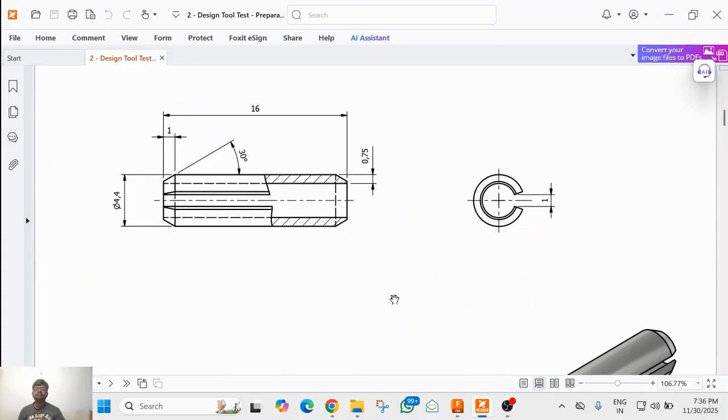So we have a barrel kind of a shape. So what we can do is we can create a concentric circle and we can extrude it to create a cylindrical shape like this, and we can then apply the chamfer at the ends, and then we can use the extrude cut feature to cut a slot in this like this.

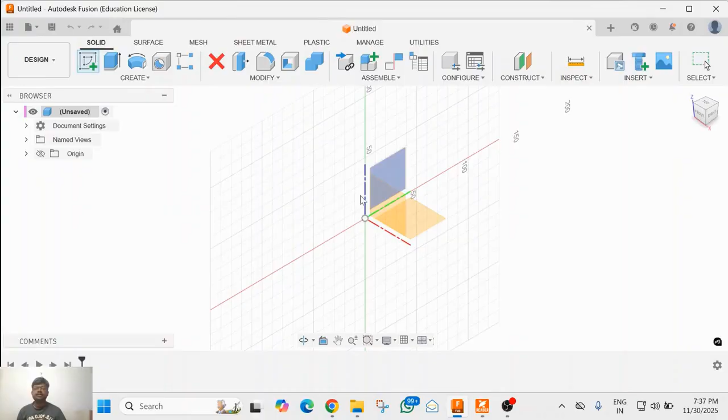So the first thing is to open Fusion and click on the create sketch, and I'm going to select this particular plane and I'm going to draw two circles. And then I'm going to give the dimension. So the dimension of the outer circle is 4.4 millimeters.

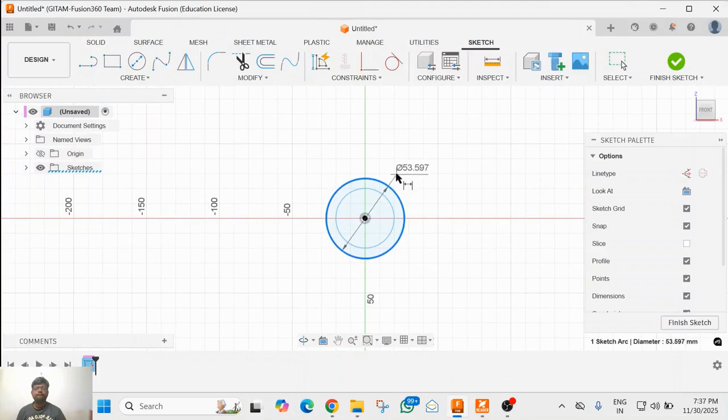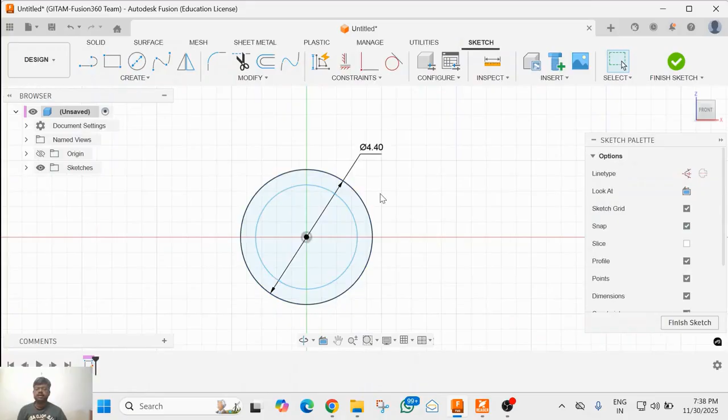And then I'm going to reduce the inner circle like this, and then I will press T on the keyboard, and this is going to be 0.75. As you can see it here. I'm going to say finish the sketch,

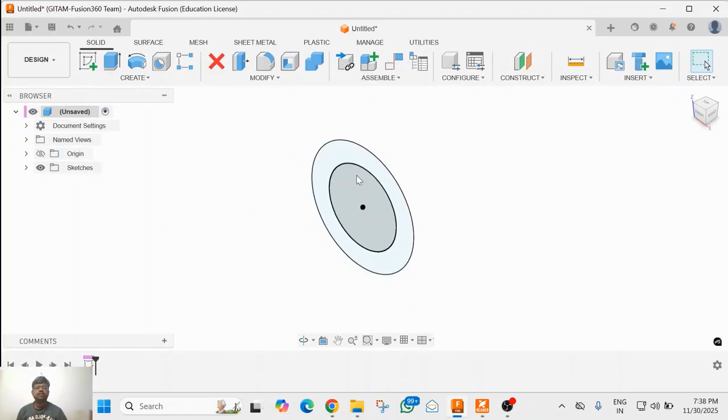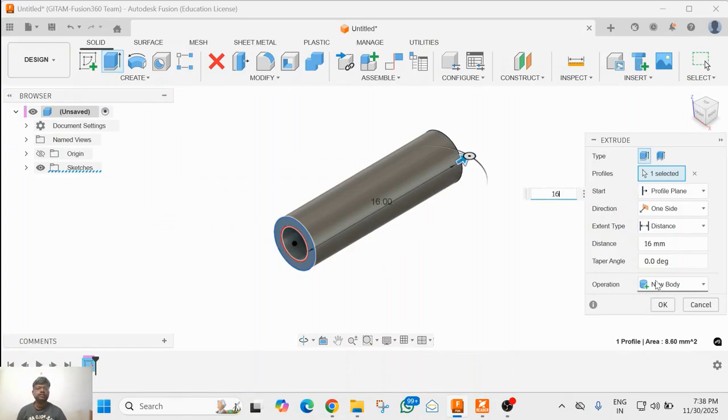and I'm going to zoom out and select this particular face with the left mouse button, and I'm going to extrude it like this. So the length is 16 millimeters. So the length is going to be 16. Now click on OK, and let me save this as exercise 1.

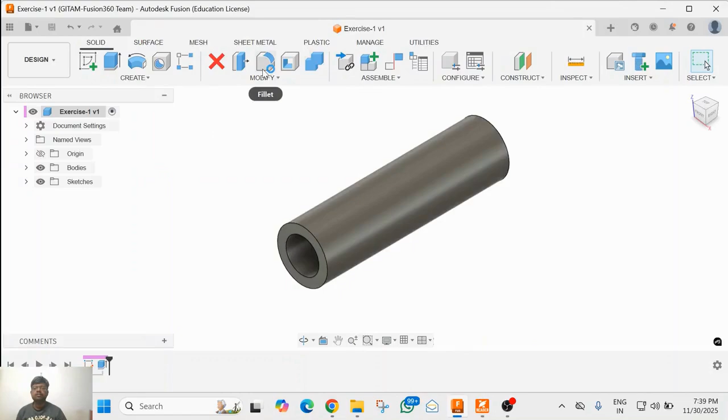And then I am going to apply the chamfer. The chamfer length is 1 mm and at an angle of 30 degrees. So I am going to modify, click on chamfer. I'm going to select this particular edge,

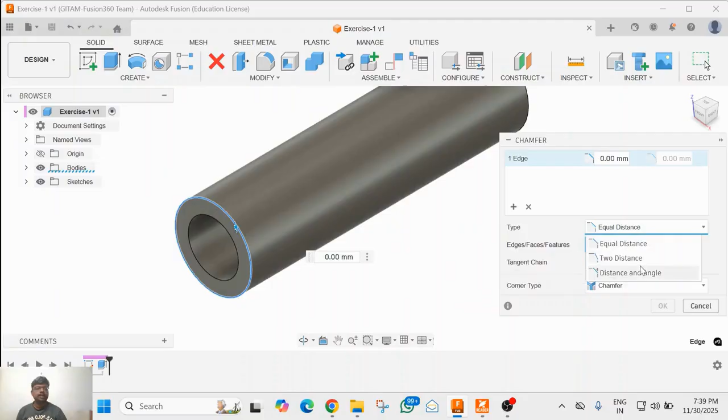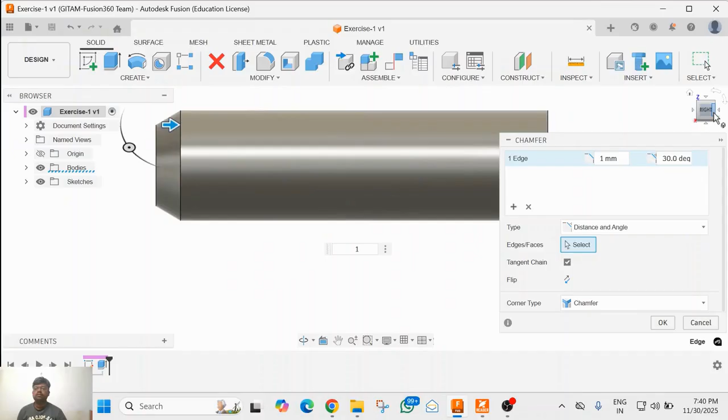and then I'm going to select distance and angle, and the distance is going to be 1 mm, and angle is going to be 30 degrees. There you go. Similarly, I'm going to do it for the other end. By using a view cube, you can move the view like this.

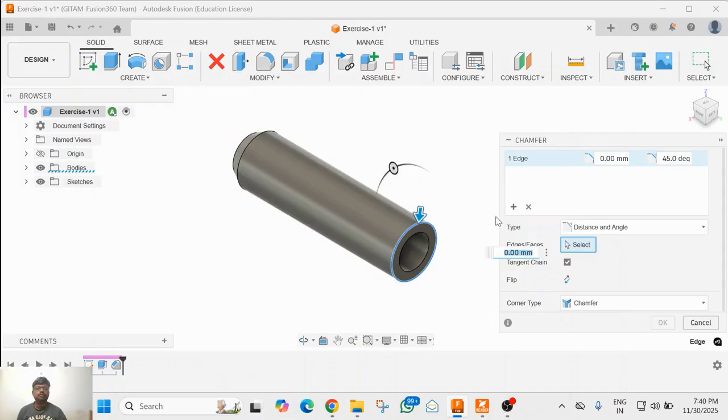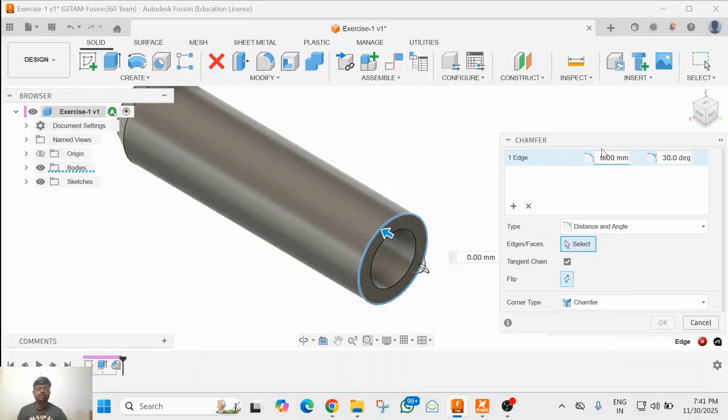Again, I'm going to say chamfer, and I'm going to chamfer this edge. And it is going to be 1 mm. And again, this is going to be 30 degrees. And I'm going to enter a length of 1 mm. Click on OK. I'm going to save this, and finally we have a slot like this.

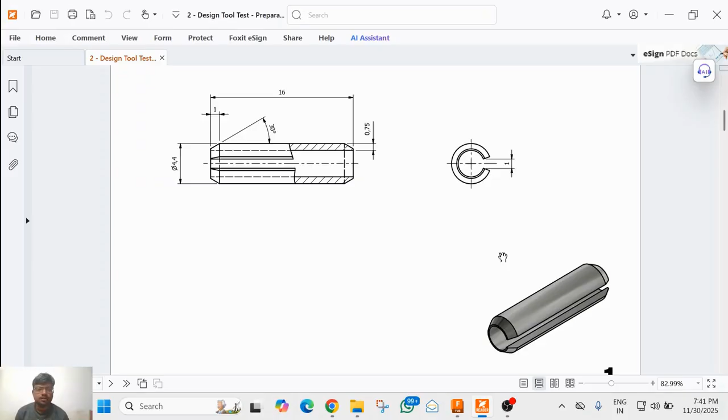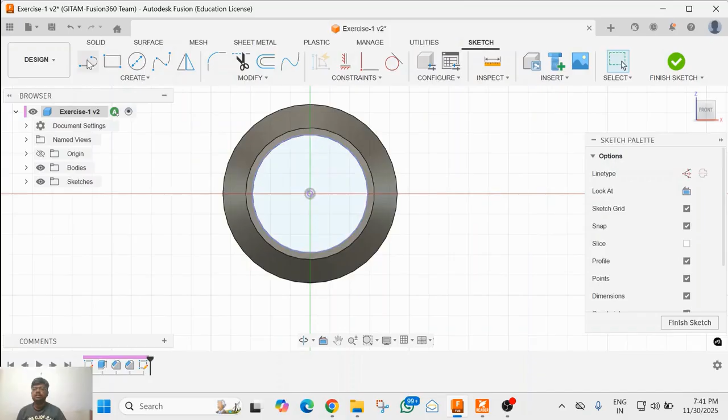So to cut the slot, I'm going to create a sketch. I'm going to select this plane and I'm going to project this particular inner face as a projection, and I'm going to create two lines like this, and I'm going to press D on the keyboard.

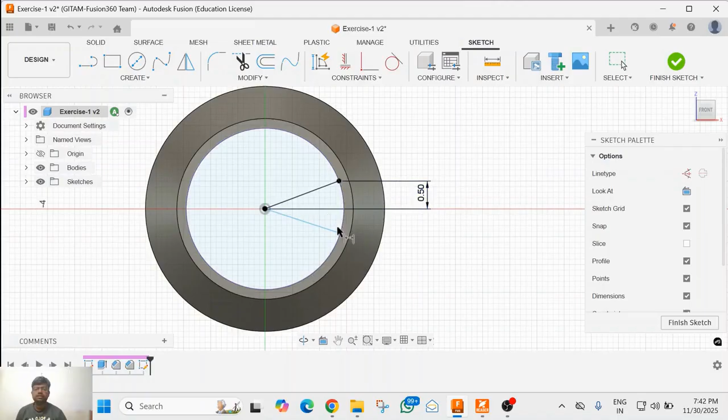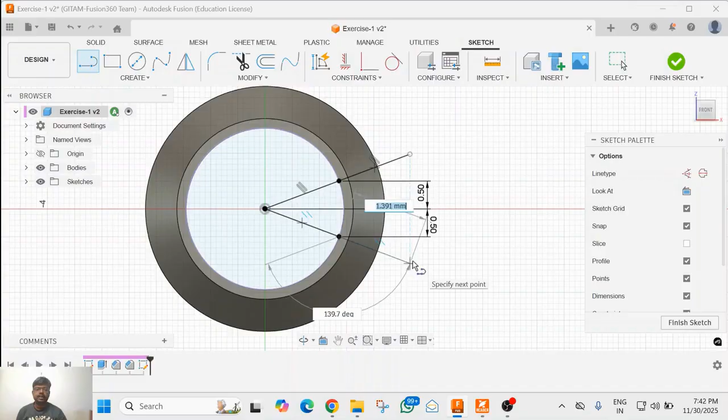And this is going to be 0.5 millimeters, and again this particular height is also going to be 0.5 millimeters, and I'm going to click the line and extend it outwards like this, and again I'm going to extend the other line like this, and I'm going to close this profile like this and click on the finish sketch.

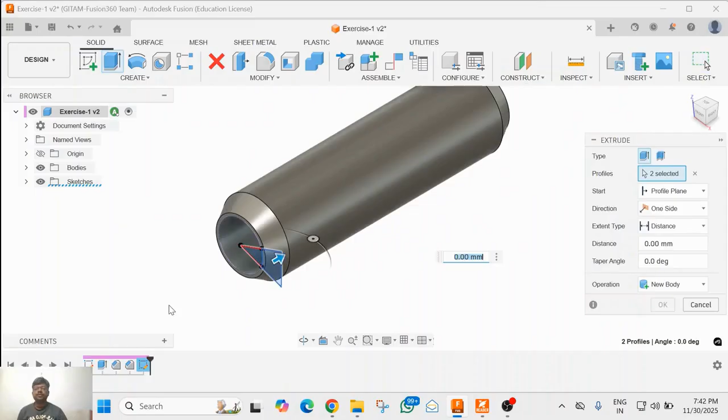And now I'm going to select these two faces by pressing Ctrl on the keyboard, and I'm going to say press pull, and using the press pull feature I can cut the profile like this, and using the orbit you can see how the shape is created. So this is going to be the first exercise. So let's go to the next exercise.